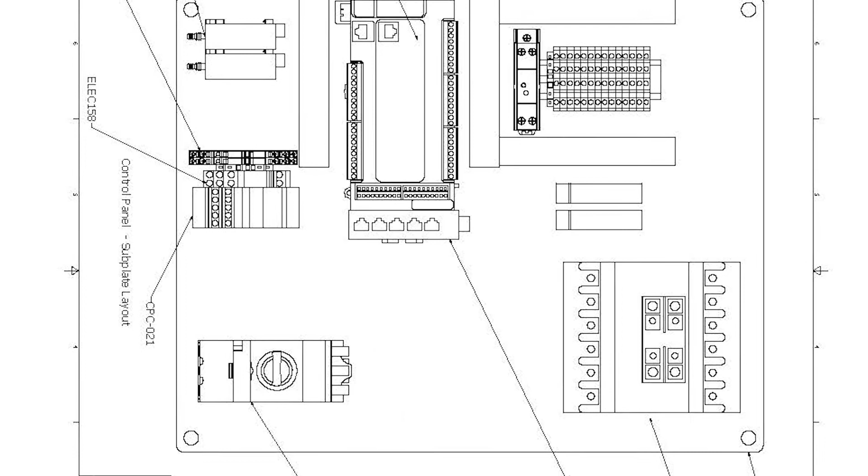All right, Alysha, of course it's your turn. Thank you, Adam, for the introduction. Yeah, so as you said, my name is Alysha Yinger. I am the Director of Engineering at RoboVent. I kind of have an overarching view of pretty much everything we do here at RoboVent, including the product design, project, system design, installation, just kind of have a hand in a little bit of everything.

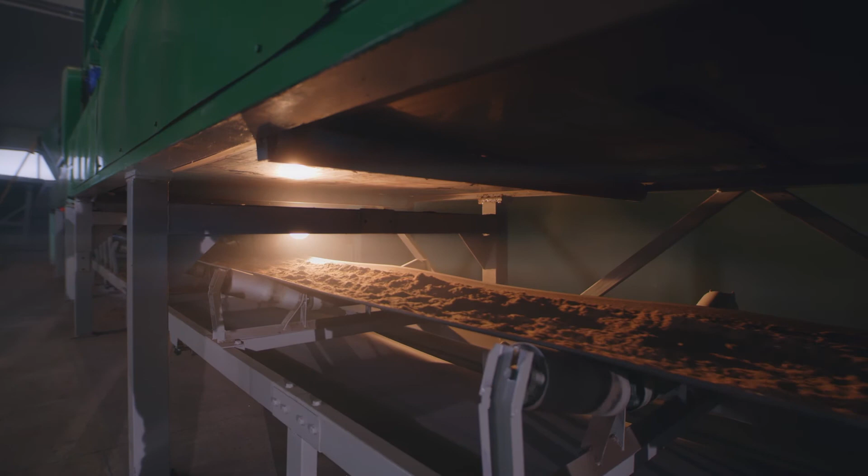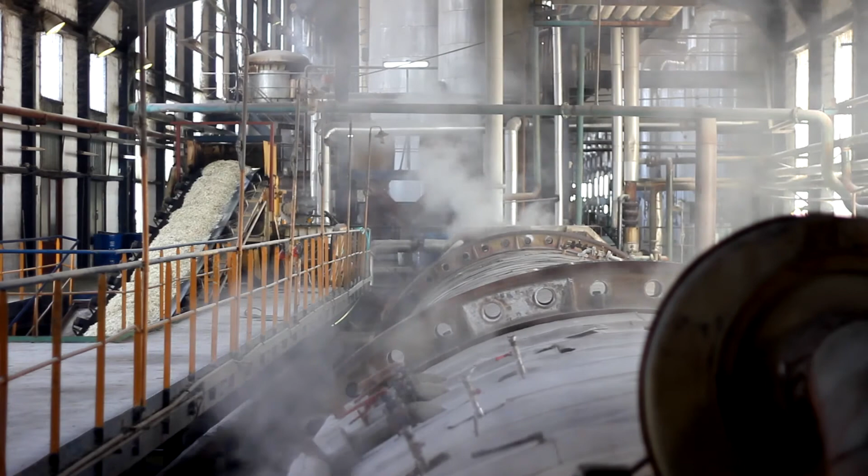At RoboVent, we are a dust collection company. We handle everything to do with particulate and all sorts of industries, and we deal with the front end side of it of, okay, I have a new system, I have particulate generation, how do I protect from that? All the way down the line of how do I get that installed? What are the best designs? Oh no, I have a combustible dust. What do we do now?

Handle all of that. I'm going to ask you the same question. What would you tell folks? What is it that you do? I think I'd say that I keep people's lungs safe. Which sort of ties in with our natural tagline of making a difference one breath at a time.

Well, I'm glad that you're both here today and agreed to sort of redo our webinar in more of a podcast format and have a little bit of fun with it, and of course educate people at the same time.

I feel like I need to start the show off with a really bad dad joke, but it relates to dust collection, so you guys play along with me here. But I love dad jokes. Why do most manufacturers prefer RoboVent systems and equipment over others? Quality? Well, it's because others combusted. Wow. Did you come up with that all by yourself? It's my first dust collection joke. Wow. I did. I wrote that one. I think I'll have to trademark it. That's a very specific dad joke type. I'd like that. My son's like, that's not funny, Dad. Actually, it's not funny at all. I thought you were going to tell me the one about the mustache. I'm seriously on fire. I mean, sorry, not fire. I just had a thermal event. And I'm just busting your chops so we can get on with it here. You're quite punny this morning.

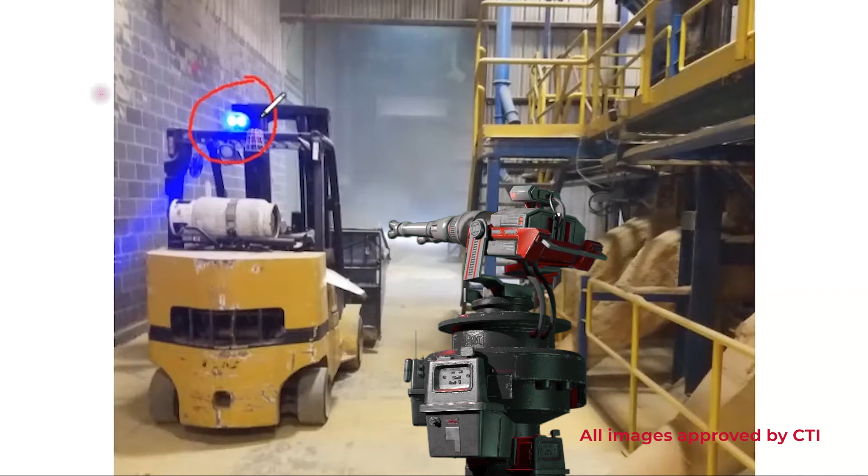So the first thing that I see, because we always talk about an ignition source, right, which could be any sort of spark or flame. The laser beams that are shooting from whatever's on the back here, I feel like could potentially be an ignition source for some of the dust that's obviously floating around this area. Adam, has a laser ever caused a dust explosion?

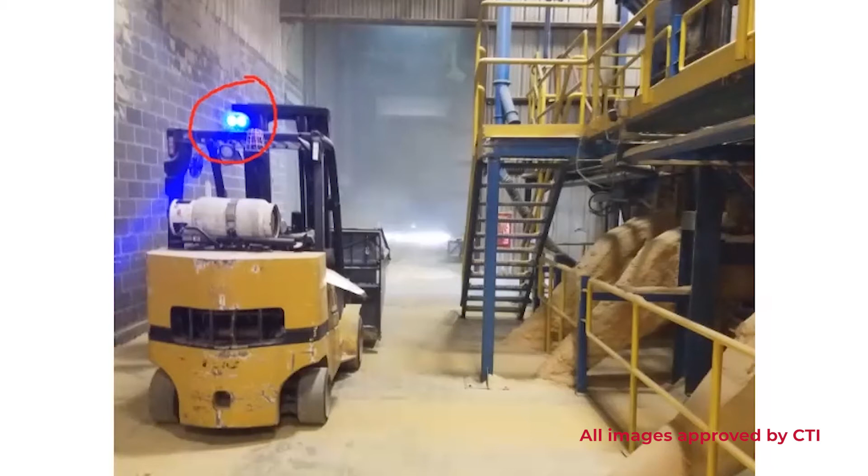So I've never heard those referred to as laser beams. Those are backup lights, actually. They shine about 8 feet behind the truck. What?

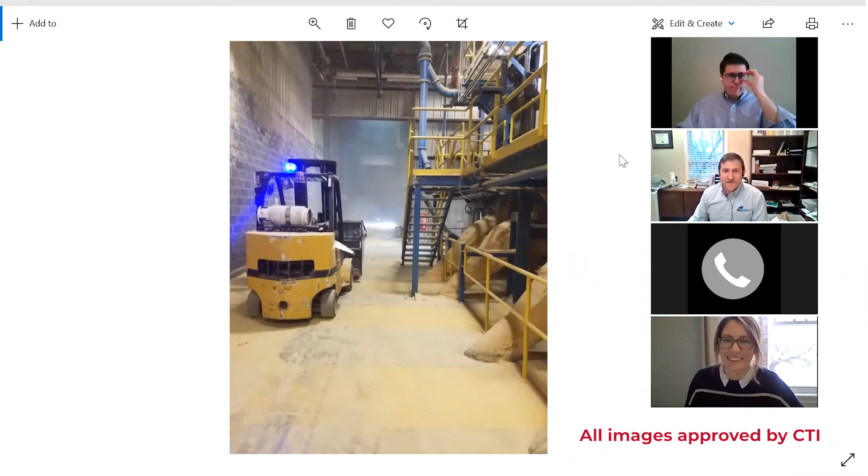Sometimes it's tough to identify the ignition source from an explosion, but I'll give you the benefit of the doubt and say correct. The whole forklift is actually the issue. I don't want to identify too many of the answers, but this forklift doesn't appear to have a rating for use in hazardous locations, which would be an EE or EX sticker on the side of it. So the forklift itself is quite the ignition source hazard.

All right, so Alysha, I'll let you use the annotate function, and why don't you circle some of the things that you see in this image? So this is what Adam was just saying. It's a really great reason why we partner and work with other companies on these DHAs. From my perspective on the dust collection side, I wouldn't have thought to immediately look at that forklift, and I don't think I would have known that it wasn't for a combustible or hazardous environment. So that's really great information to know.

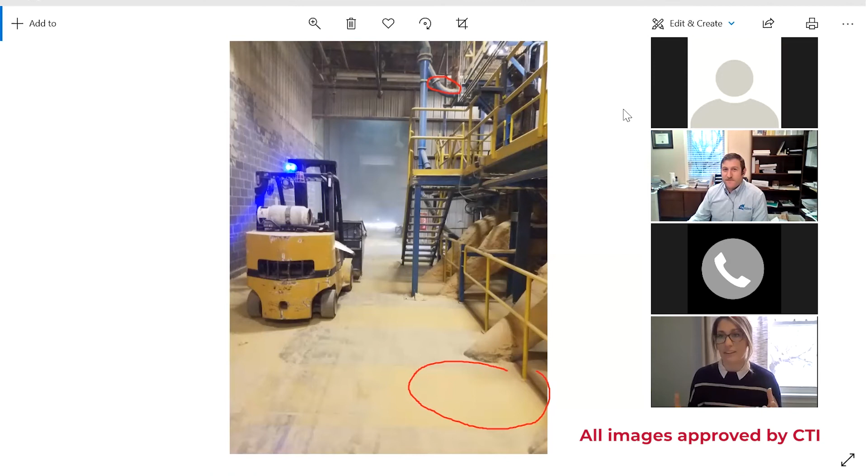On my end, what I would be worried about is that there's a lot of particulate buildup on the ground, as you can see, and on this piece of duct up here. That is all hazardous. That's particulate that, if a pressure wave were to come through or something was to knock it off, would disperse into a cloud in that area. And let's say this forklift did cause a spark, that could cause a flash fire or a more serious explosion.

Especially when we're looking in a facility, you look through rooms or at lights, and you look at these hazy atmospheres to see that you're not controlling the dust in that area very well. Those are some of the things I noticed.

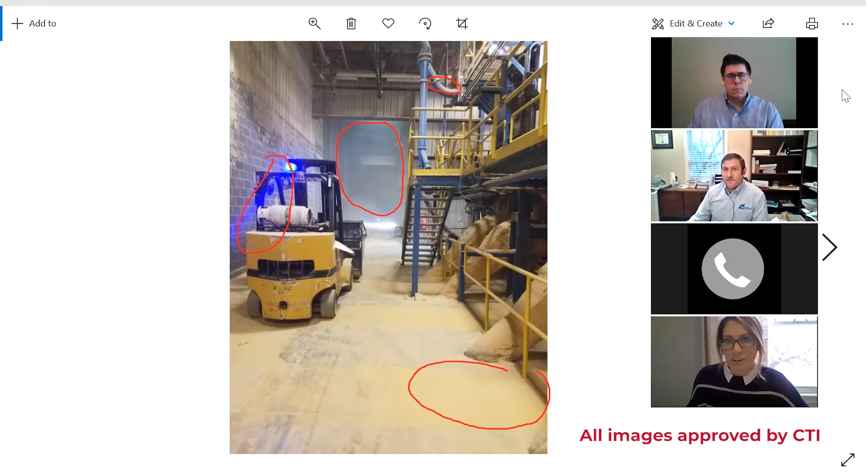Looking at this ductwork, which is another thing we often take a look at: how is it sized? Is it conveying at the right velocities? These are proper fittings and proper branches. That's always a good sign, but we would need to confirm that we were conveying that material properly and didn't have any buildup not only on the outside of that duct, but also inside.

Alysha, that was very good actually. I was impressed. You noticed the buildup on the angle piece right here. I don't know if you saw these two circles that I just did.

No. Yeah. Oh, did we? In the middle on that light beam. I don't know, I didn't get control. I just annotated. Oh, okay. Okay, I didn't realize that was you. The last two that were there.

So, okay. Alysha, very good. I also look at how light bends and what it reflects and refracts off of. So you can see that haze in the background, and it's really tough to see here. But that buildup, when I do a DHA, I look up a lot because these are horizontal overhead surfaces that naturally are going to collect dust. And they're hard to reach typically, which means they don't get cleaned as often as they should.

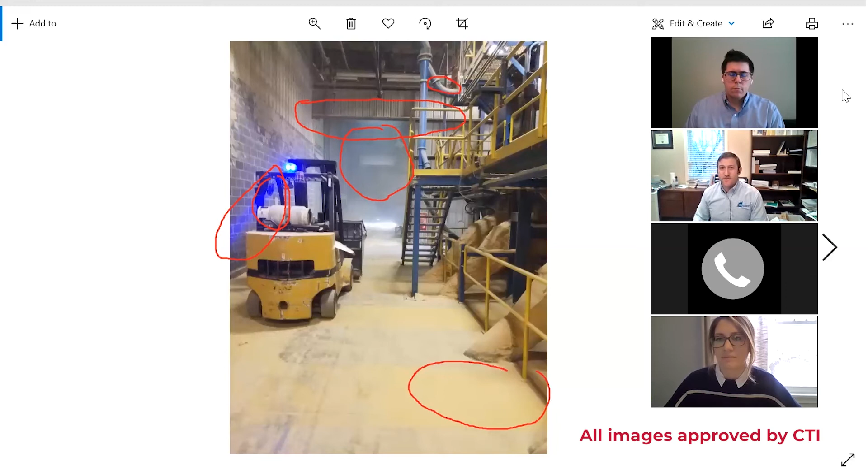And Alysha brought up a very good point, that pressure wave. Let's say this forklift gets a nice little pop or sets off a little fire around it. Well, that's one part of a hazard. But if this dust cloud is in this entire room, that little spark is going to spread throughout the room, throughout the building maybe. Or if a motor is overheated and it pops and shakes the room, all this dust is going to sprinkle down and cause what's called a secondary explosion, which is when that flame or spark starts reacting with all those particles and spreads throughout the building, and that's how you blow a roof off. So very, very good observation.

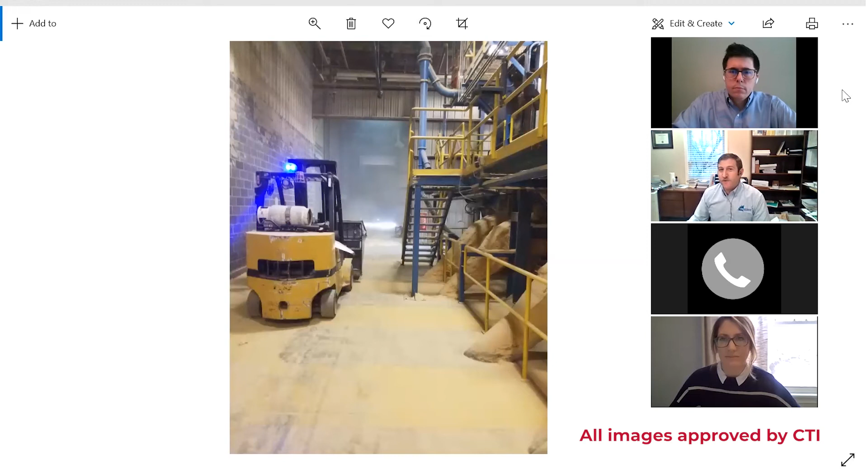Is there anything else in here that we could point out? I mean, those were the most things. Without identifying what's going on in the equipment and where that dust collection line goes, I think you identified the buildup, housekeeping, and this electrical issue.

All right, let's pull another one in here. I'm going to hand this one over to Alysha. What are some of the issues? What are some of the potential F-bombs, those filter bombs, that we see in this image? This is an exterior shot with two different dust collection systems.

Yeah, so this is something we really commonly see. Let's say a customer purchases a dust collector and installs it in their facility, and everything's fine and dandy until they do a dust test and realize that it's combustible. The great thing about dust collection nowadays is that a lot of dust collectors can be converted over to an NFPA compliant collector very easily, or at least somewhat easily, depending on the one. In this case, they just remove a side panel and put that explosion protection on it, this vent right here.

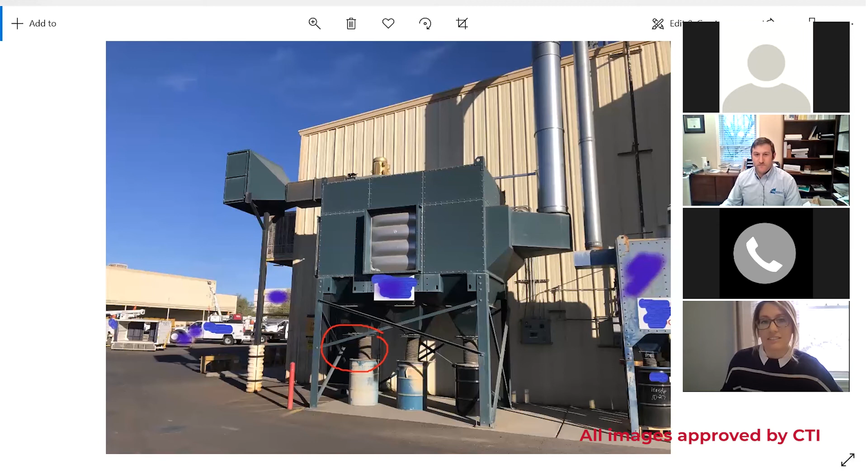But what they haven't done is protected down here. They haven't put the rotary airlocks or protections on this drum. That just looks like a drop connection down to a flex hose, and that's definitely a risk. This happens a lot, especially when customers don't complete that DHA: they don't get the full picture. They think, oh, I need a vent. Awesome, I'm putting a vent on my collector. But there are more steps you need to take to protect from an explosion. So this customer would need to go back and also add that rotary airlock.

I can't really see up here, but I'm hoping there is an isolation valve or a return valve so that this flame front couldn't go very far. I'm going to assume it's somewhere over here, but not really sure. But that's kind of what I would look at.

So those are very good points and accurate. And also with what you circled down here, I look at this a lot, especially flex down to a covered drum, to verify that the drums are still bonded. I look at bonding and grounding programs and PMs during my DHAs. So if you're going to attach this drum, make sure that the flex has the metal coil running throughout it so that it bonds the drum to the dust collector, which should be grounded either through a grounding rod or through the facility. That's one of the other aspects I would look at.

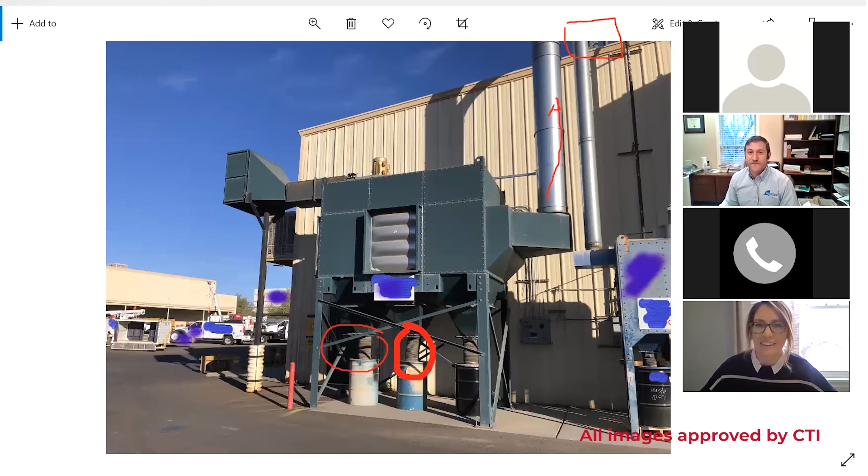This one does have an isolation valve on the roof, so impossible to see pretty much. But I actually wanted to show you this panel itself and where it's directed. This is an area of heavy vehicle traffic, including semi-trucks unloading material. So if that blows and there's a truck passing by, it's going right into the cab. This is like the example I used earlier: they just bought a dust collector with a panel on it, but where's the panel going? I would say one of the biggest faux pas we see is direction, that you're directing a blast specifically to that area with the panel.

So there's a few options. They could move it or re-engineer it, which is tough. They can put what's called a deflector plate on it, which has calculations based in the standard. So if this blows, it's going to direct the flame front kind of up. Because this, if it blows, it's hitting some vehicles. There's forklifts there all the time. So besides all the great things you identified, that was something else I saw.

Yeah, that's a really good point too. We often get comments like that: well, we've tried to direct traffic around it, or we've done this or we've done that. And it's like, that's not really an option. That is your explosion zone. And if you're not comfortable, or if you don't have that ability to keep that zone clear, then you have to do the other steps.

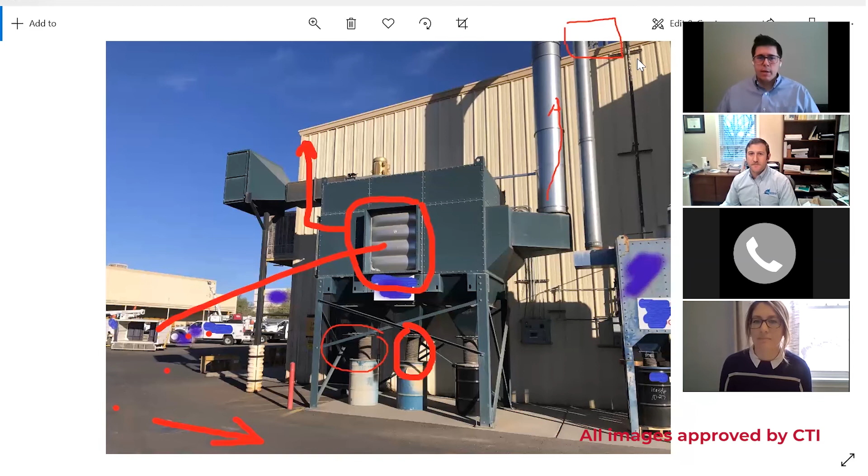So I'm glad I pulled this in. This is something that I think we can continue a lot in this material that we cover, because in every single picture we can help folks identify things. And you're doing this on a regular basis in all the analysis work that you're doing. We've got one last photo here, and that is this one here.

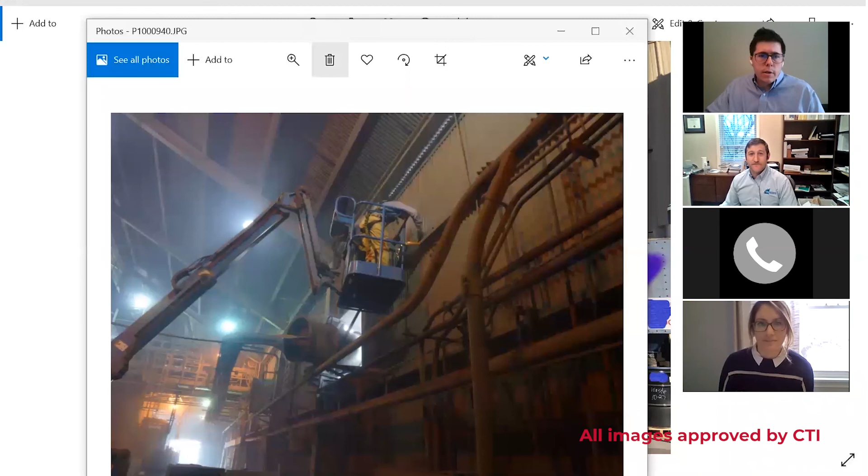So, it's my favorite. Yeah, I think this is actually you in this bucket up here. That is me. So you can't answer this one. Okay. Alysha, we'll have you go first, and then I'll go, and then we'll hand things back over to Adam. Okay, so sometimes looking at these pictures was a little like that I Spy game. You know, trying to look through a bunch. Yeah, exactly.

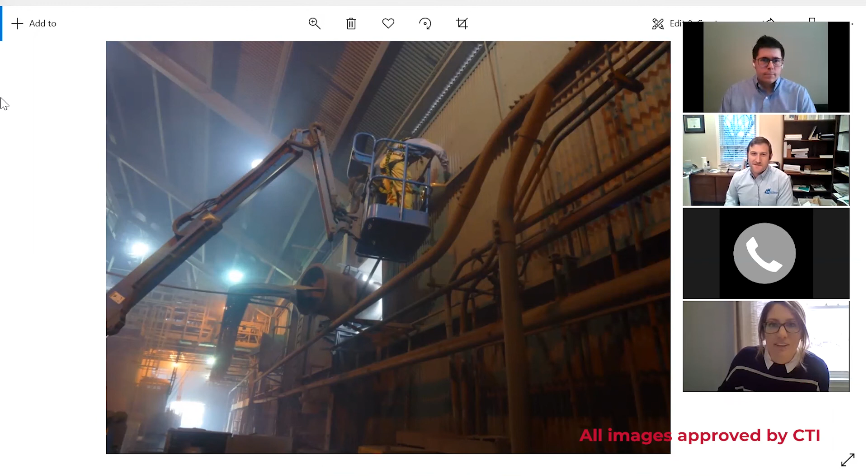So the first thing I would notice is I look at the lights. So we'll go back to that concept of, if you're kind of getting this haze, you're not able to see through your facility, you're really not controlling your dust problem in your facility. And anytime that happens, any type of flat surface is now going to become a shelf for particulate and possibly explosive particulate. So that would be a big one here.

I think this is a ducted system, but I can't really tell, and I'm not sure what it's ducted for. But I would definitely want to check what's in there, make sure the velocities are okay, everything's running properly. And then we see Adam over here actually brushing dust off of one of those surfaces to collect and test, but that's kind of what I see here. It looks like there's about as much dust on those surfaces up there as that snow on that tree in your background. Yeah, probably a couple inches.

And a lot of these photos actually came from Adam, so what do you think, Adam? So that's exactly it. This is at a metal forging plant. I think they create metallic silicon, and it was an interesting facility. I find this a lot with foundries and forging facilities, that their rooms look like this. They always said their doors are open enough. But as we can see from these hazes, there is no central dust collection. They have dust collection on some of their equipment, as you can see from the piping.